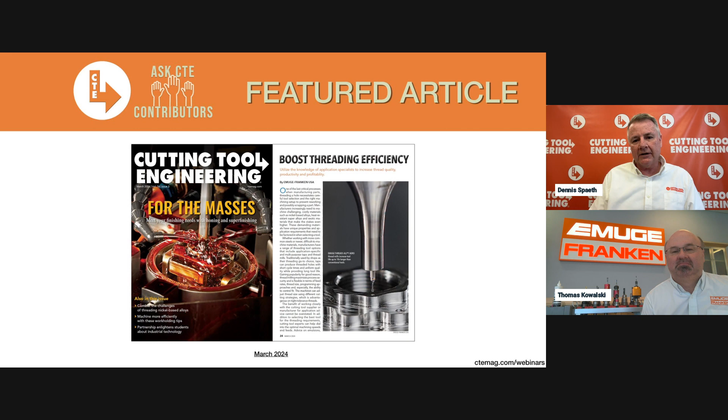We're here today to reinforce our March Cutting Tool Engineering article on boosting threading efficiency, which was contributed by Emuge Franken USA, a company with a long history in tapping technology. Industry veteran Tom Kowalski, a regional manager for Emuge Franken USA, will draw upon his 24 years of technical expertise with the company to share 5 tips that will help you avoid tap breakage.

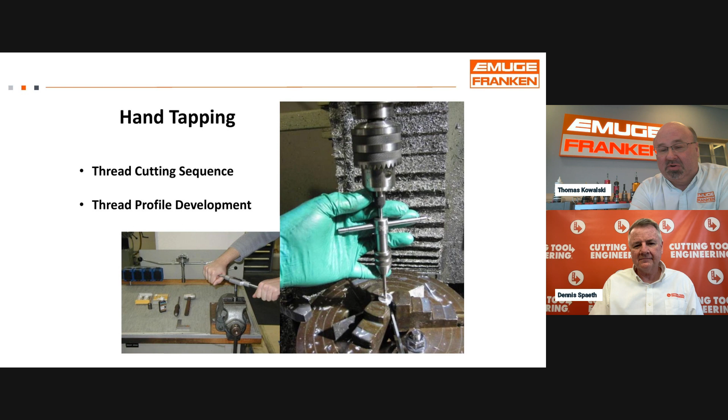And the company Emuge is really a big part of how machine taps today are so automatic and maybe overlooked. So just a little reminder that most all tapping throughout history has been done as hand tapping, a very manual operation where you have to have good work support. You've got to have a very clean working area, right? And what we're doing with taps, a set of toolmakers taps were always used to develop the thread profile in steps. And in the case of a toolmaker set, it's usually 3 taps, could be 4, but it's a rougher and then a semi-roughing tap and then a finishing tap.

And I got to witness this toughness firsthand by doing this manually. And really, it was Richard Glimpel's designs and his innovation that made the machine tap that we use today really one tool that replaced 3 tools. So it's important that we appreciate and have an understanding, if anything else today, of really the magic of a machine tap today and how it has replaced hand tapping.

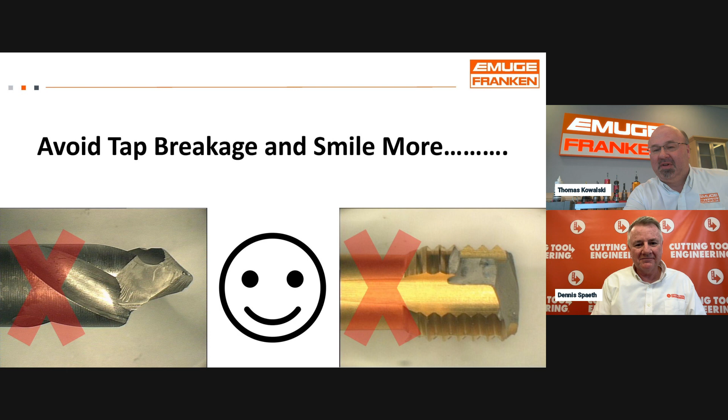So I want to reiterate that for a long history, machine tapping has really been an automatic, magical event that happens in seconds. What we're going to do is go through some of the easy precautionary things you can do in the machine shop to make machine tapping more reliable and to avoid tap breakage.

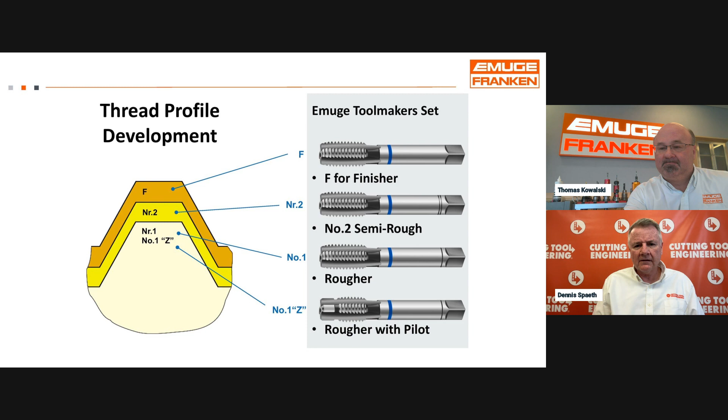Peanut butter and jelly. So we're going to start by talking about drills, because drills set the stage. They can make or break our tapping, and drills and taps are really linked together like peanut butter and jelly. For machine tapping, we always want larger drill sizes. Every thread has a range, a minimum and a maximum. With today's carbide drills, we have a chance to make a very precise bore that creates our minor diameter, and we're always going to try to use slightly larger drill size diameters for machine tapping.

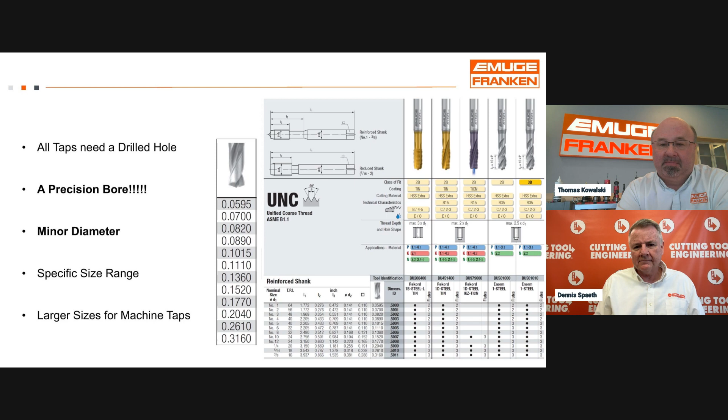What that sets up is the percentage of thread, the thread profile. One observation I've made over the years is that a lot of breakage and poor tap life in difficult materials comes from referencing very old drill charts historically set up with 75% full thread for hand tapping. That's because, throughout time, tapping was a hand tapping operation, and that's where 75% full thread comes from. Today, with modern machine tapping and carbide drills, we can get you to the best pre-tapped drill size so the machine tap operates much better, at about 65 to 70% of the thread profile. This is plenty for any tapping operation.

So think about larger sizes always when doing CNC machine tapping. Think about larger drill sizes when tapping deeper threads that can sometimes be 3 times D, 3 times the nominal thread diameter, in depth. Also think about larger drill sizes for stronger materials, like those in the aerospace industry or the medical field.

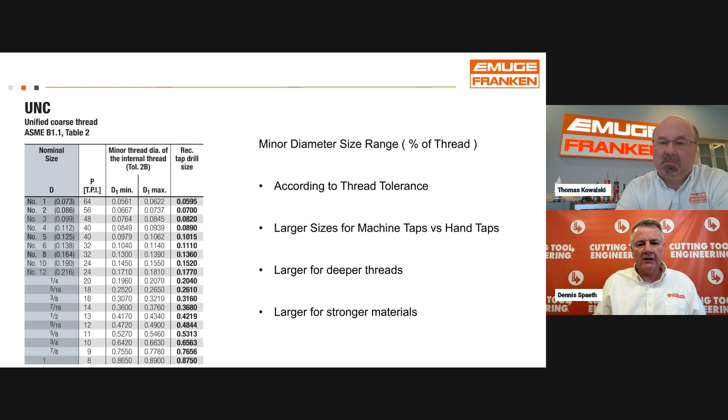Sure. At Emuge we have a very extensive program of cutting taps, forming taps, and now thread milling tools. For us to get you to the best option, there are 5 points of information we have to process with you to get to the right place. They are as follows.

The first and foremost thing is we want to know what the workpiece material is that you're working with. The second part is to know the workpiece material condition — what the hardness is, what the tensile strength is, and so on. That's going to pinpoint for us how to start the conversation about getting to the right cutting tap or forming tap.

The third thing we need to know, especially important for cutting taps, is the type of hole — we'll talk about why that's important. Fourth is the thread depth, because there are often physical limitations on how deep a machine tap can actually cut or form the thread. The last thing, ironically, is usually the first thing people tell us: after those 4 points, the last thing we look at is the thread size and the tolerance of the thread.

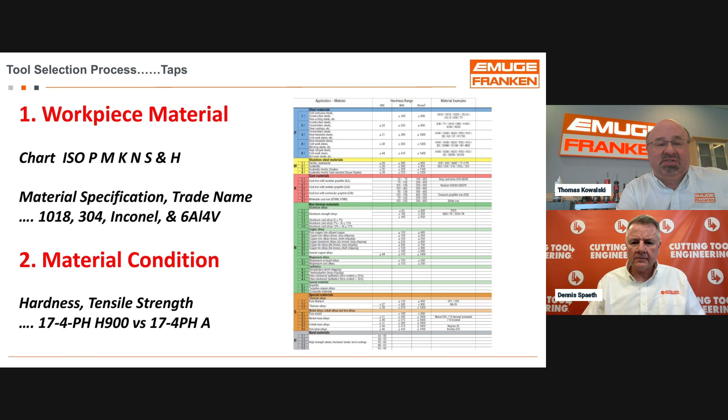And then also, point 2 is the condition of your material, because again, we need to know the hardness or the tensile strength, because even within a similar material, there are different heat numbers and so forth, which are going to really drive us towards a choice for the best starting point for your tool, your tap.

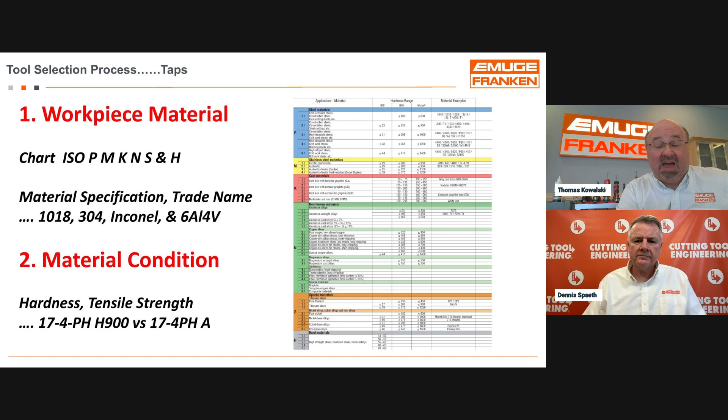Now, the reason workpiece material is so important is understand that with machine taps, the cutting geometry is defined by the material we're going to work in. The two things I point out here: the rake angle, this is where the chip is formed and rolled in the flutes. So it's very important that we have this workpiece material type.

And then the other thing that is governed here is the profile relief. This is how the machine tap goes through its cycle in seconds, how it flows and cuts through the material. These are very important features that you don't see, but they are different as we go through the different geometry families. What I have shown here is just some of the nomenclature in the EMUGE system for our different cutting geometries.

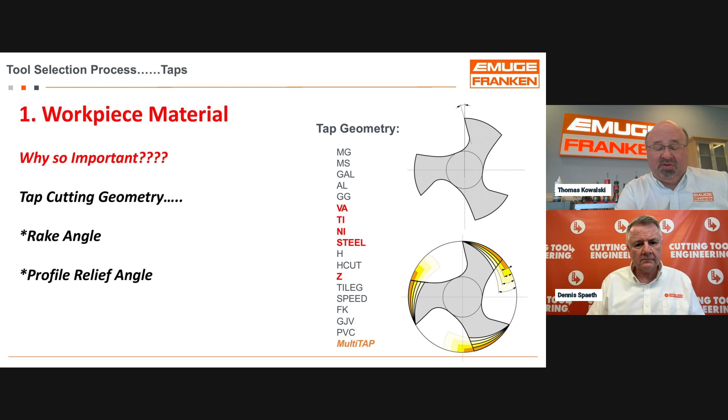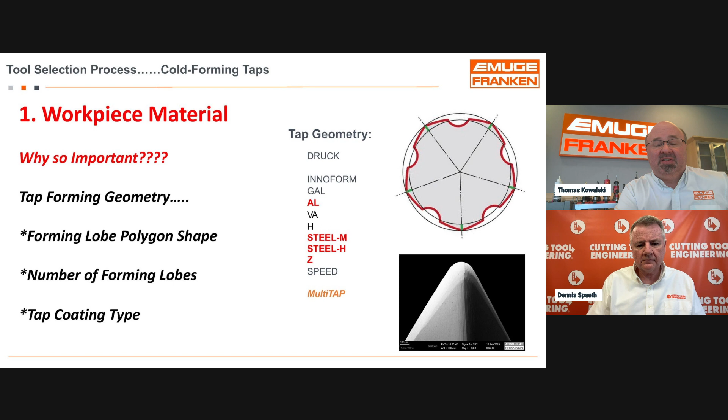The same holds true if we're talking about cold forming taps. Now, cold forming taps are not creating chips, but again, they are forming the material or pressing the material into a thread. So for the same reasons, we have the type of shapes, the polygons, and the number of forming lobes that are used to press the material into your thread form. And all modern cold forming taps have some type of coating, which is like a first level of lubrication. So workpiece material is actually governing the designs of the cutting and forming taps.

And that's when we can talk about different families of cutting or forming taps as being material specific. They address certain materials - in the case of titanium, very elastic materials; in the case of nickel, very strong materials; and stainless steel, where again, we have to have very positive or high cutting geometry.

The third point is something very unique to taps, and we all should understand that with cutting taps, we have to know the hole type because the chips that we're making in the tapping process have to be, just like in the hand tapping operation, removed and out of the way of the working surface. So in the case of through holes, we can simply use that spiral pointed tap to push the chips out of the way. But in the case of blind holes, we have to have spiral flute type taps that are augering or lifting the chips out of the hole. This is why it's so important that we know the type of hole, because in tapping, the chips must be transported.

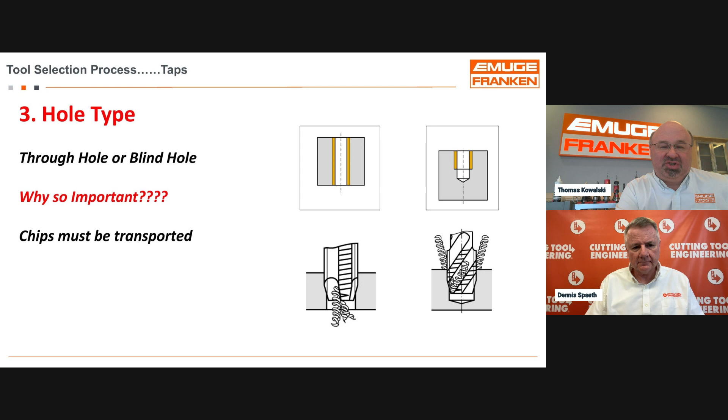And if you wanted to have 1.5 inches, which is not out of the ordinary - 2 times the nominal diameter - of thread depth, that would be 15 turns. If you took the circumference of each turn times the 15, you'd have 35 inches of chip swath in each flute. But you also have to remember you have 4 flutes at 35 inches, and you have 3 cutting teeth, or the lead is 2 to 3 threads, so there are separate swaths being made on every cutting tooth. That would equate to over 400 inches of swath being made, and that has to be eliminated or augured out of the blind hole.

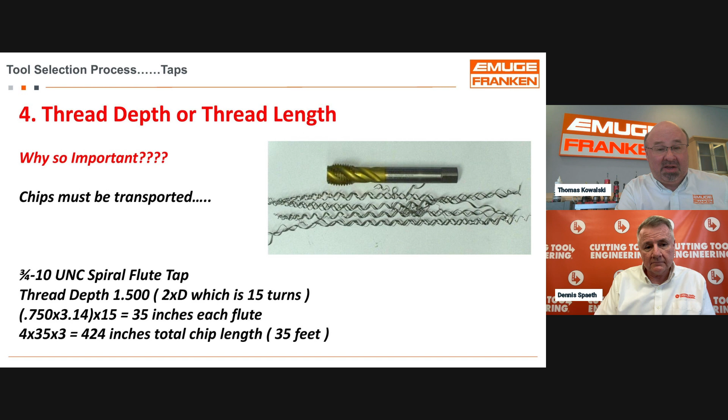So you can see why thread depth is very important for us to consider when we talk about automatic machine tapping. The other reason it's important, though, is in blind holes, we always ask: what's your maximum drill depth versus the minimum full thread depth? Because remember, the machine tap combines 3 different taps into one tap, and all that is condensed into the cutting chamfer or lead of the tap. So the tighter you want to go to the bottom, we need to know - sometimes if it's less than 2 threads, we have to think about thread milling.

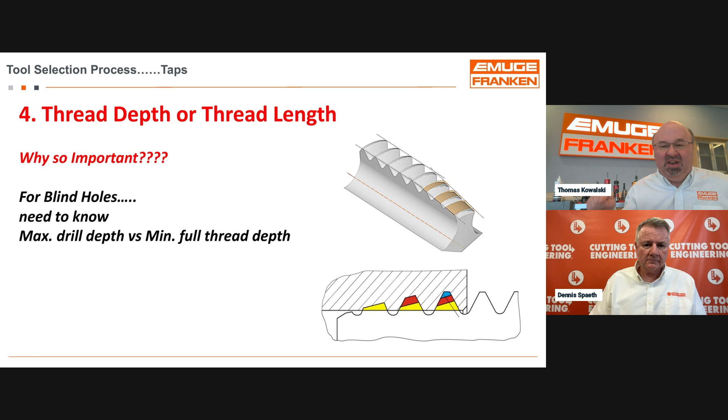Because a machine tap physically has to have at least 2 thread leads to develop that thread profile as one tool. So for blind holes, number 4 is very important. We need to know the thread depth. And in the case of that depth, we also need to know what's the difference between the maximum drilling depth and the minimum full thread depth that you must have. And that leads to this

Explanation about chamfers or leads on cutting taps, right? And this is a DIN's listing. Our spiral point tap would always follow form B, which would be 3.5 to 5.5 leads to develop the thread profile, and that's a single finishing tap.

For blind holes, it becomes a little more condensed. Typically, we try to use modified bottoming, which is form C, and that's 2 to 3 threads. It takes us 2 to 3 revolutions to develop a complete thread profile with the machine tap.

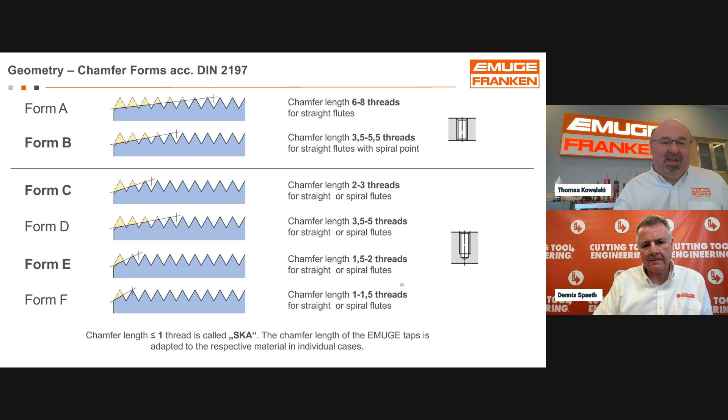And then the worst case scenario for us is form E, and form E is 1.5 to 2 revolutions. So you can see that, again, with machine taps, we're doing all this work in a very short area, and you have to make some decisions about larger drills and things like this to have success.

Now, the last point, and like we said, it's usually ironically the first thing we hear on the phone, but it's the thread size and tolerance. And at EMUGE, you'll see that all of our taps, whether it's unified threads or metric threads, will be marked with the thread size. In the case of the unified series, the thread size and the pitch, and the series, obviously,

and then the class of fit. Usually that's 2B or 3B. For metric, it's usually 6H, could be 4H, different oversized that we stock. But we do not mark EMUGE taps with H and D limits.

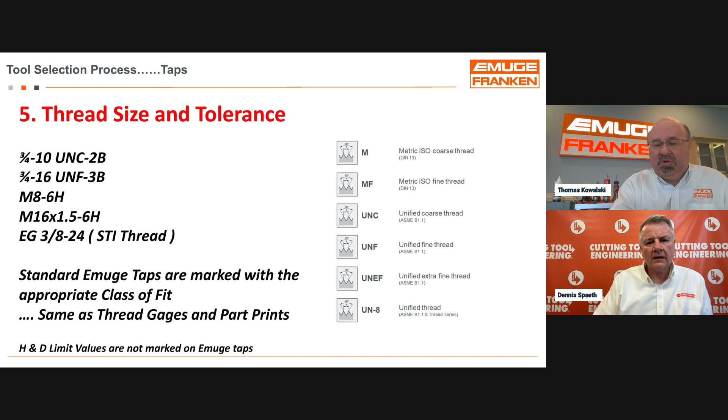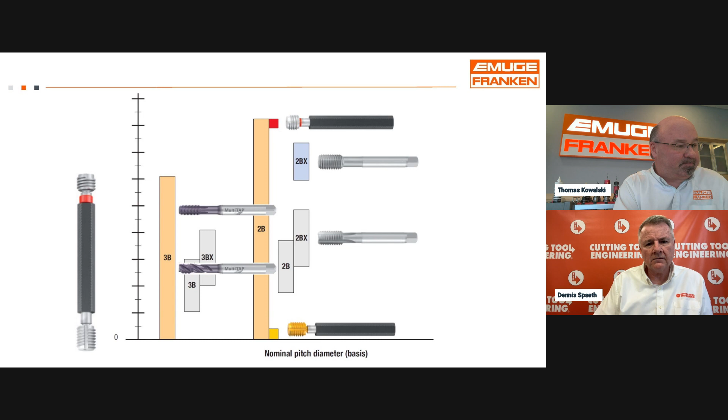Can you talk about the role tool holders play and just how machinists could select the best tool holder for their tapping applications? Sure.

At Emuge, we've always made taps and tap holders together. We are the only tap company that makes a full complete line of tap holders. Tap holders are so essential for tap performance

for numerous reasons. But one of the things today, even though most CNC machines have synchronous spindles, people often ask, do I really need to have a tap holder? And I would tell you yes. And we'll try to show why having the right tap holder will make all your tapping applications, as far as machining go, better.

So I'm going to advance just, again, some of the unique things that we're trying to point out about tapping, machine taps. I put up this slide, which is showing a cut tap cycle. And you could break that cycle, which literally could be 5 seconds long in a CNC machine. There's 7 different stages of that cycle, right?

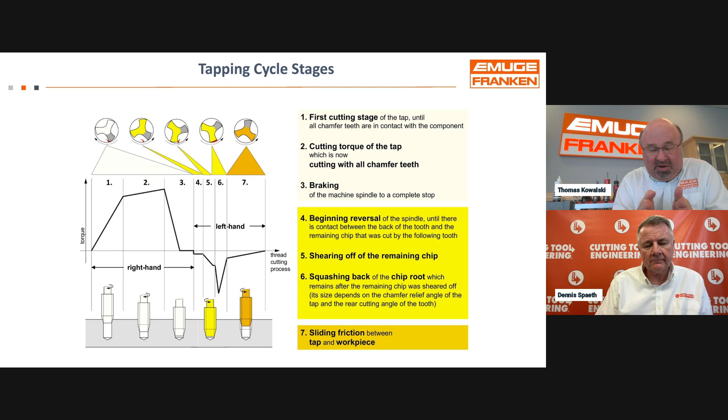There's a lot of complications here, and this is why tap holders are so important. You have to have an appreciation of what the machine tap is doing. Like we said, it's replacing 3 hand taps, right? It's squashing all the work into that lead, which we said more and more people want to have full bottoming.

And then the other thing that taps have to do, along with getting rid of your chips out of a blind hole, it's much more difficult. Out of a through hole, it's all pushed ahead. But again, it's a lot of work. And then this change in direction. So I would tell you, one of the most important things is to really think about how you're holding your taps. Even in today's machines, we're going to show you why that's important.

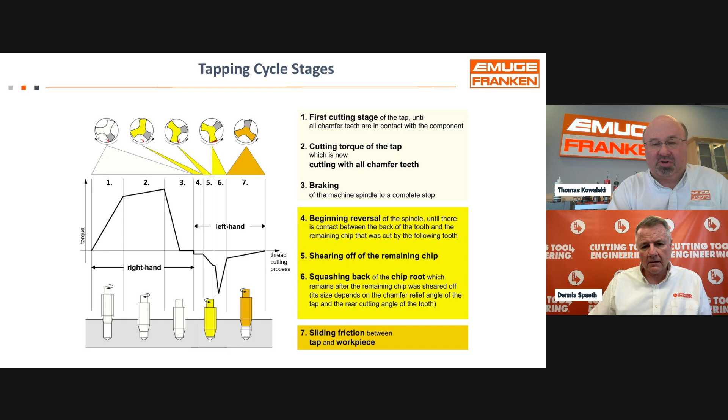So taps, again, they're sharpened screws. When they rotate, they move. A spiral flute tap with a high positive rake angle and profile relief is going to flow very freely.

You can feel this on a Bridgeport machine if you ever try this. I'm going to show you some tap holders I have with me.

These are tap holders that have what we call a compensation feature. If I hit the bottom of the hole, I need a compression allowance. If I'm using a tap with a spiral flute, I might want to stay and just let the tap guide itself. So there's a tension compensation feature.

For older machines, this was the way taps could operate and cut very nice, precise threads. If it's a spiral point tap like this one, as it dulls, it's going to increase the amount of force that it pushes. So we have a hard start feature on this tap holder that prevents oversize.

I'm going to ask that we go back to the screen because, again, spiral flute taps will always feed rapidly, and we need maybe some tension to hold them back. So think about a team of horses, and we have to sometimes hold them back.

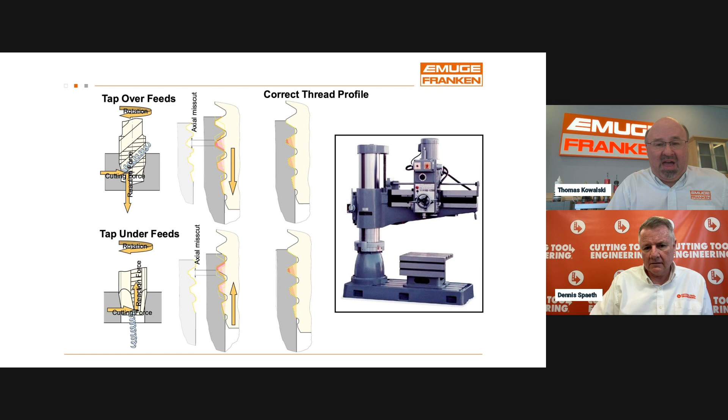In the case of spiral point, it's the opposite. As the tap wears, we're pushing against the tap. So we have that hard start feature that I was just showing you. This was how tapping was done, even as an automatic cycle in drill presses and older machines.

So tap holders are important, and how do we get to the right type of tap holder? Just like when we decide where we're going to start with tap choices, our tap holder choices have to do with, first and most obviously, the type of machine tool we're using. Today, most machine tool choices are CNC machines that have synchronous spindles. But there are different machines we have to think about, different choices.

The second thing that's important, and that picture illustrates this point, is the tap size. Emuge has experience making very large cutting taps, up to 130, 160 millimeter cut taps. You see a picture there with a tap driver and robust tap, just to illustrate that point.

So tap size. When we get to very tiny taps, we have to make different choices. Maybe we need ER collets that lock the taps with no movement, because these are little toothpicks, if you will, running at very high speeds in your CNC machine.

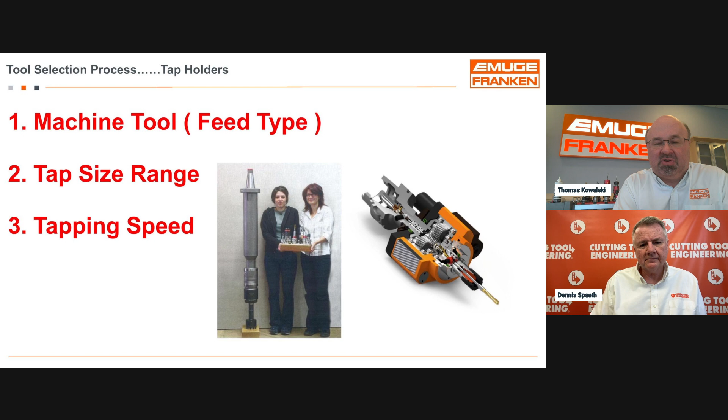And then the last thing is the tapping speed. We're going to show some things at the end here where we can go faster than your machine is even able. We'll talk about something called speed synchro.

So, feed types. Most of our choices today have to do with CNC. I'm going to show a typical example again. This is a soft synchro. This happens to be a coolant-fed tap, so we are sealing all the coolant and blowing it out the bottom of this tap. So we use ER collets.

With ER collets, I'm just going to show you real quick if I can grab one here. ER collets for taps would always fully encapsulate the tang, the square on the tap shank.

Why? Taps reverse, remember we made that point? One of the only tools in the middle of its cycle that has to reverse direction. So we're creating chips, and a lot of torque on the way in. And then we come to a complete stop and we reverse the tap, squash chip roots, and clear out debris as we're coming out. So we have to have collets that fully encapsulate the tang of the tap shank.

We can go back to our slides. So we'll talk about soft synchro. Really, that's the best way for synchronous.

When we go to older machines, maybe large boring mills or drill presses, they still might have NC controls, but they don't have a fully synchronized spindle where the rotation and the feed axis are talking to each other. So in that case, we use tap holders that have tension and compression that give us an allowance for that error that could occur.

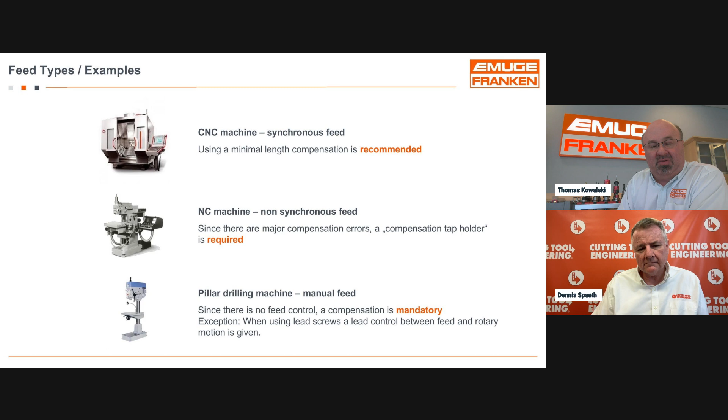So soft synchro, I am a big fan of soft synchro. Soft synchro technology was invented by Emuge in the mid 1990s, really at the first introduction of rigid or synchronous tapping, where an encoder is on your spindle. But even with that encoder, there's always going to be lag, because we know taps. Our engineers came up with the concept of soft synchro.

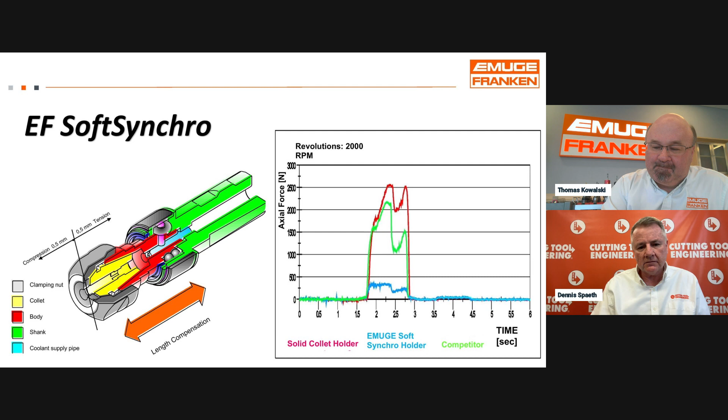Sure, Dennis. We tried to point out today, or at least I tried to illustrate, some of the uniqueness of taps. One of the things about taps you should always think about is lubrication as the key for tapping. It's one of the most important things for modern taps to operate. If you look at a CNC machine, you usually have emulsion coolants today with lights-out type machining. You don't have a lot of cycle stop time to have high straight oil or lubricants like that added to the process. So taps really do require a high quality, a high degree of lubrication.

And the reason is, again, they run at relatively lower speeds. There's a lot of surface contact. They make an enormous amount of chips in the case of cutting taps. And forming taps create a tremendous amount of heat because of the pressing, the forcing of the material to flow into a thread form.

And in water soluble coolant environments, they have to have the oil. So for me, I'm always asking people to look at their coolant concentration in this modern CNC machine. We like to see like a 10 to 12% emulsion for tapping. This is always maybe a little more than what people want to give us, but when they do a lot of tapping, they'll usually see it our way.

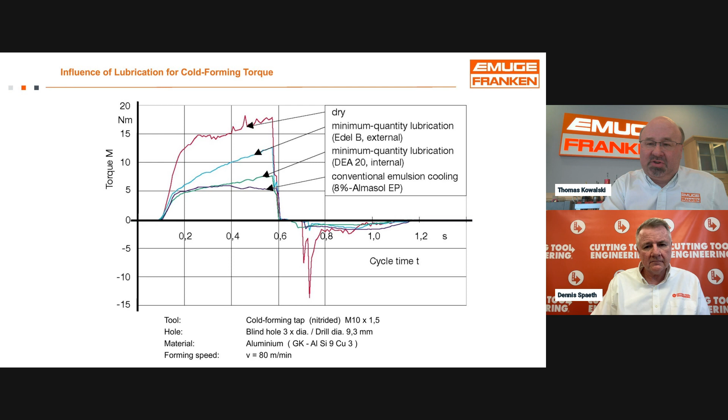And they are really minimum quantity lubrication added to the tap cycle, measuring the torque. The bottom is conventional coolant in the sump, about 8%. And again, you can see it's a 4-to-1 difference in reducing torque in the tapping cycle. Torque is wear, torque is heat, right? Torque is really the measure for us of tool life.

If we talk about what is a good tapping fluid, I have here an EMUGE tapping fluid bottle, and some of the things that we put on there: cuts precise threads - yes, that'll help. Reduces tap breakage - yes, it will. Slows tap dulling - of course.

But the things about this fluid that make it kind of unique is it doesn't burn or evaporate. It's a lubricant, on a microscopic level. It's like liquid ball bearings. And this is going to drastically reduce, in the case of a cutting or forming tap, the amount of torque. And that is what all good tap fluids do.

They don't burn or evaporate, and you shouldn't see a lot of smoke. You could put them right on the tap, still run your coolant, and it won't wash away. You'll probably do your whole bolt circle with one application, and it effectively lubricates the tap where it needs to be at the working surface, really increasing your chances of success with taps. It could be our fluid or other fluids, but it has to be a really high quality lubricant that doesn't burn or evaporate.

I'm going to show you one of our company lab reports where we did testing in very tough material, Toolox. This shows all the points we're talking about with tap geometries, comparing the differences. We have a mention of coolant here: E is emulsion, O is for oil, P is for paste, like a solid. In the most extreme cases we sometimes have to use a solid lubricant. Oil would be like the EMUGE, and emulsion is for lights-out type operations. This really shows coatings are another part of lubrication today for modern machine taps.

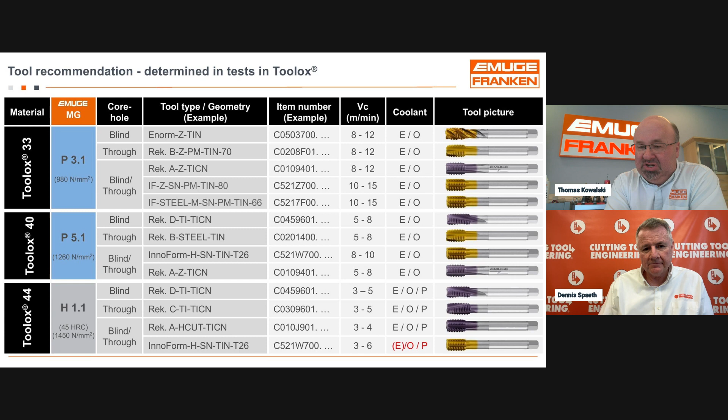Can you talk about how speeds and feeds factor in? Sure. We kind of went through a journey talking about all kinds of different factors, and it led us to this final discussion about tapping speeds and feeds.

Let me eliminate the feed question first. Feed is defined by the tap when we made it and ground it, and every tap's pitch is its feed rate. For each revolution, the tap advances by its pitch. So whatever speed you end up with, the feed rate is determined by that pitch. It's really part of its DNA when we made the tool.

So let's talk about tap speeds. Tap speeds range in our book from 3 to 262 surface feet per minute. So good luck, it's a pretty wide range. But let me give you some background. Just like choosing the right tools or the right tap holder system, speed is really defined by the workpiece material. That range up to 262 is wide open.

So I was going to give you the Tom Kowalski five-second rundown. There are three numbers you should always keep in mind with taps: 15, 30, and 60. Let me explain what those numbers mean to me. When the material is very, very tough, like titanium alloys, nickel alloys, or very tough stainless, 15 surface feet is a good place to start. It's an excellent starting point.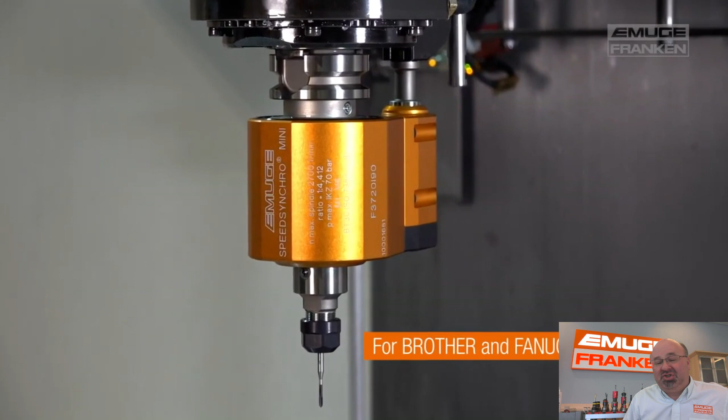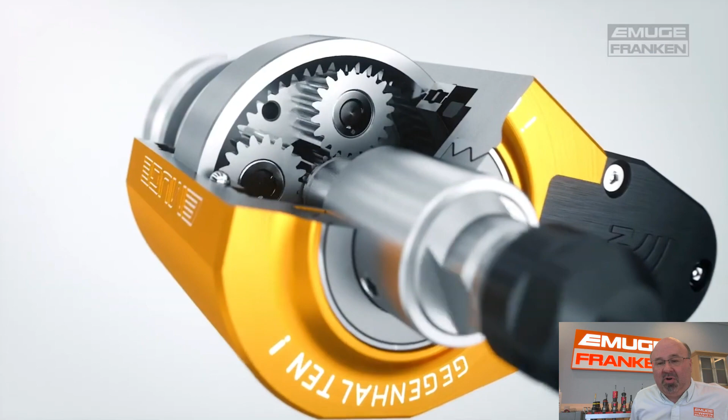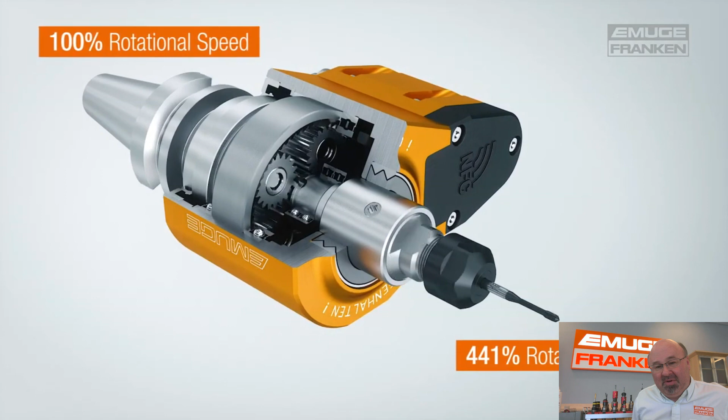Speed Synchro came about because taps have to stop and reverse, and machines, to effectively do this at very high RPM, are not going to be able to do it to a certain extent. So what Speed Synchro does is it takes the input rotation, say, of 1,000 RPM at the spindle, and it puts it to 4412 at the tap, and that is because of the gear. It's a speeder head, but it also has soft synchro technology built into the speeder head.

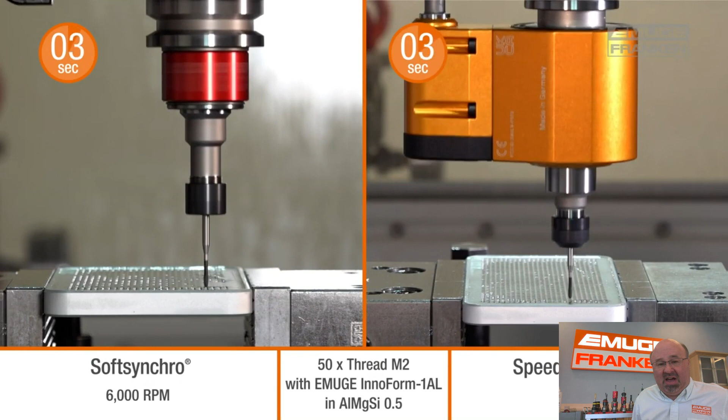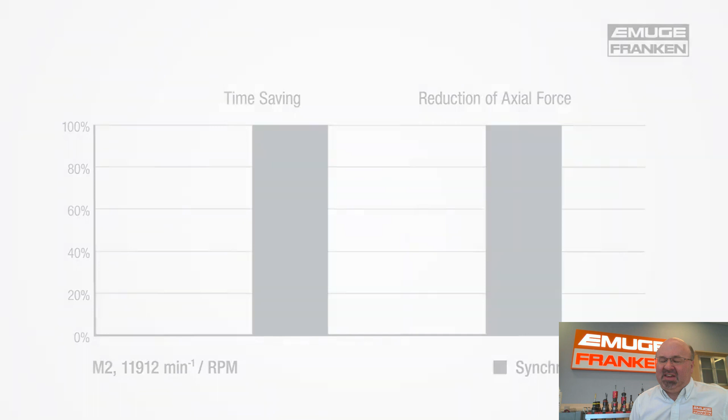So you're going to see a side-by-side rigid tapping, stopping at 6,000 RPM, and also the same tapping cycle at nearly 12,000 RPM. But again, the machine only has to get to a quarter of that rotation. This saves a lot of energy, a lot of wear and tear. It makes for better tapping cycles, and it really literally is the fastest that you could physically tap in a machine.

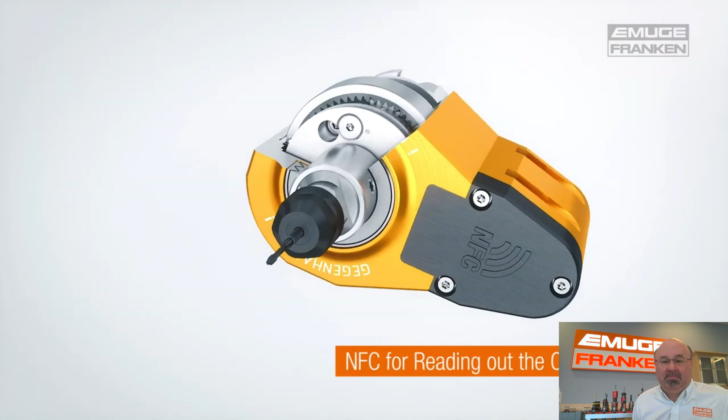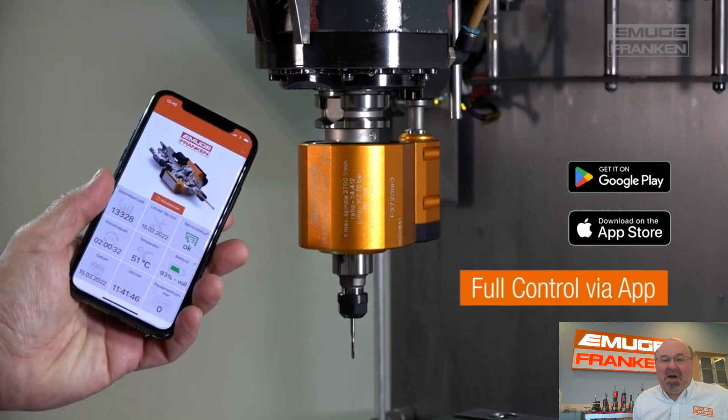And we can also monitor all the operation data with our smartphones today just by holding it up to the side and having the data come to our phone.

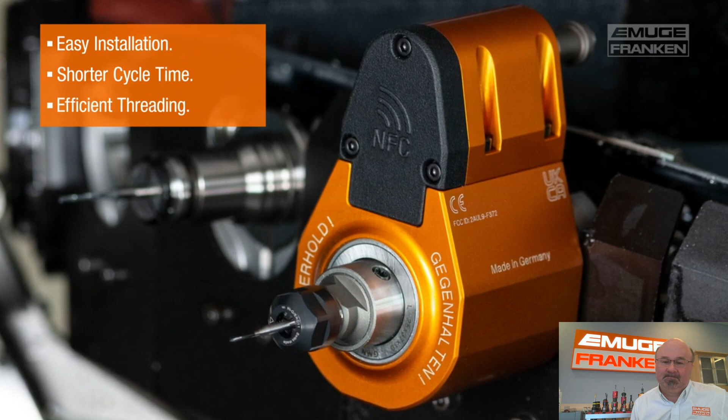So Dennis, that's really the latest technology in machine tapping, that right there.

Yeah, Tom, I just want to ask a question. I think that's come in from the audience. So what if you can't use any sort of fluid at all? Take a sip.

Well, if you can't use any kind of lubrication fluid at all, we're going to have sleepless nights because if we have to tap materials like 316 stainless, it's going to be very problematic. What we're going to lean on the most is the coatings that are on the machine tap that are going to give us the best choice or the best results to get proper tapping without breakage.

If we can use emulsion, that 10 to 12% rule for something like 316 stainless steel would be where you want to be. If you could add something like this fluid that I was showing you to the mix, even if you put this somewhere in a table of the machine and dip the tap and still ran the coolant, you're going to get the best results with this stuff in something like 316 stainless steel.

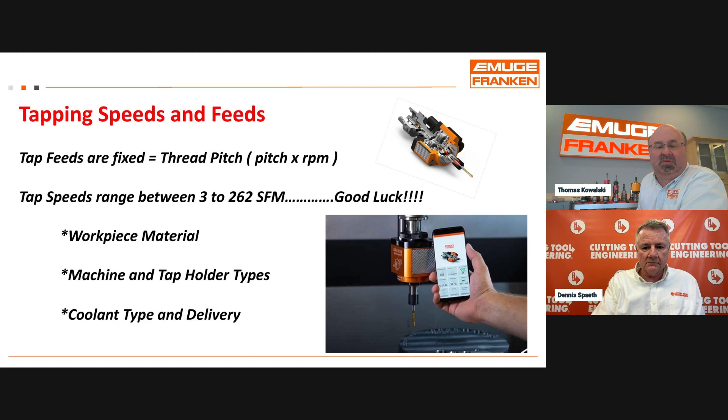We have two different styles of Speed Synchro, really based on the size range. The standard, we can put coolant through to the tap. And then also the mini that you saw in the video, I believe we can still deliver coolant to the tap itself. If we can get more information, if someone's really interested, we could follow up. Just knowing the machine model they're working with or looking at to put something like the Speed Synchro in, we can best tell them what the coolant delivery would be.

But yeah, they are marked IKZ. So IKZ in our system is internal coolant Z-axis through the tool.